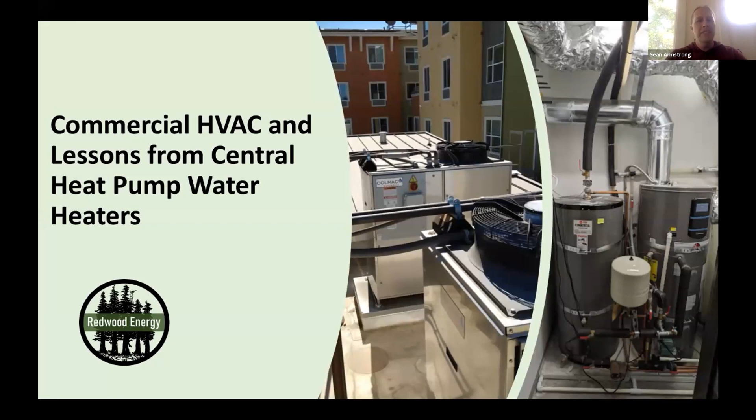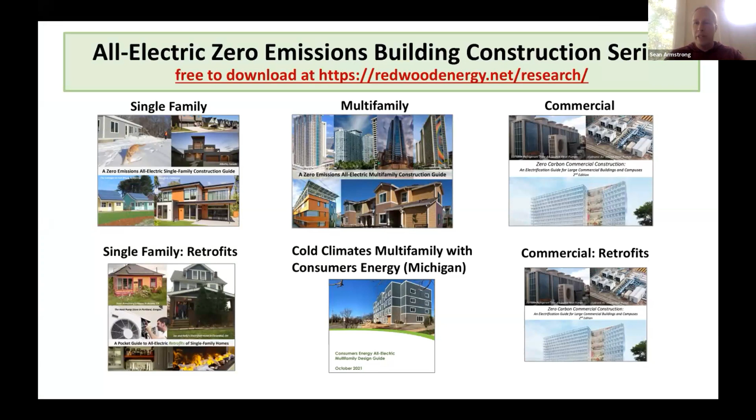I'm going to jump into commercial HVAC systems, and then we're going to feed into the lessons on central heat pump water heaters. So first, I'm going to go quickly. A lot of the lessons that are in these slides are from these booklets that are free downloads, just so you know, over at Redwood Energy's website.

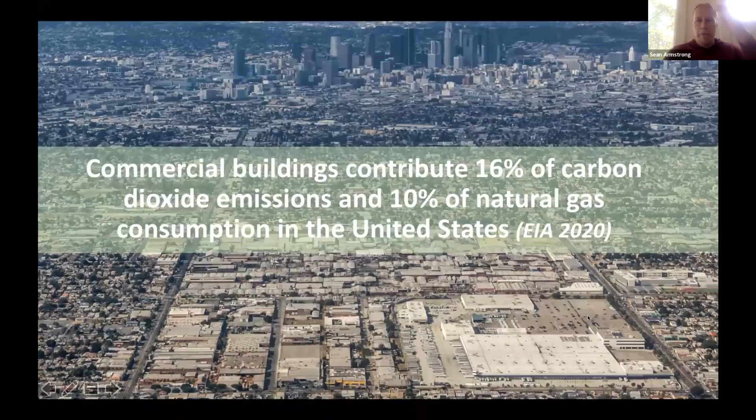Now, jumping into it, commercial buildings. This is a big load. 16% of carbon dioxide emissions in the United States, 10% of natural gas use, big one. So here's some prominent engineers. They just got to share the details. Almost all of our gut retrofits are able to go all electric. For major renovations, we're able to guide the client to go all electric by providing technical solutions that are cost comparable and have a similar life cycle savings potential to equivalent gas systems. And we can make these arguments pretty well.

So Ted Tiffany, Guttmann & Blaevoet, John Gautry over at Integral. Higher end developers and universities are absolutely 100% on board with electrification, no question about it at all. Taylor Engineering, prominent folks: 3 to 4 years ago, only 10% of our projects were all electric. Now about 90% of them are. Now in California, and I recognize every state's different. California has like 12% of Americans in it, and I have good stats on California.

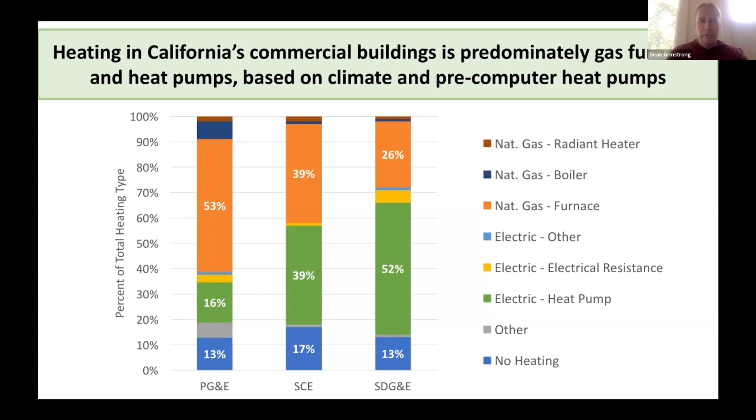So the lesson I want you to learn from here is the green is heat pumps, orange is gas furnaces, and it's different by climate. PG&E is Northern California, SoCal Edison is Southern California, San Diego Gas and Electric, the furthest south. You can see how as the climate gets warmer, heat pumps jump up to 52% once they work out climate-wise. That used to be the case when there were only single speed heat pumps. Now there's inverter controlled heat pumps that I'll share with you as we go, and they can do any climate.

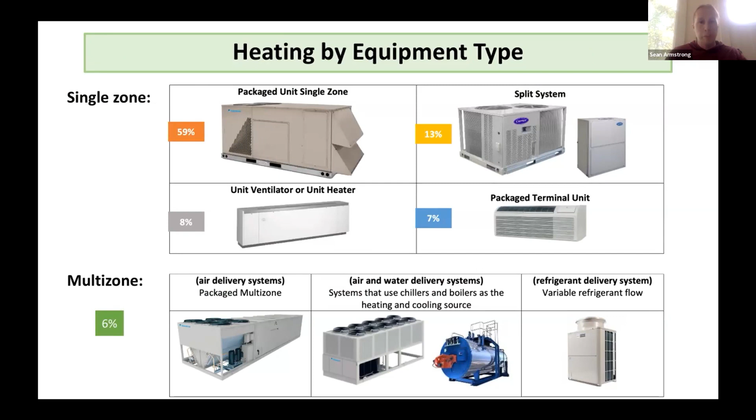So roughly what we're looking at in single zone products, 59% package, 13% split system, 8% just little wall units, and 7% packaged units. And then only 6% are the big building multi-zone. But big buildings have a disproportionate number of things in them. So it can be a very similar amount in square footage, big buildings versus all the small buildings added up.

So talking about these ones, Stet Sanborn over at the Smith Group says, the biggest market, if you want to make a move on actually getting gas out of commercial buildings, is to target the rooftop package units with easy retrofits. And it is easy. There's tons of these products that are made that are cold climate now.

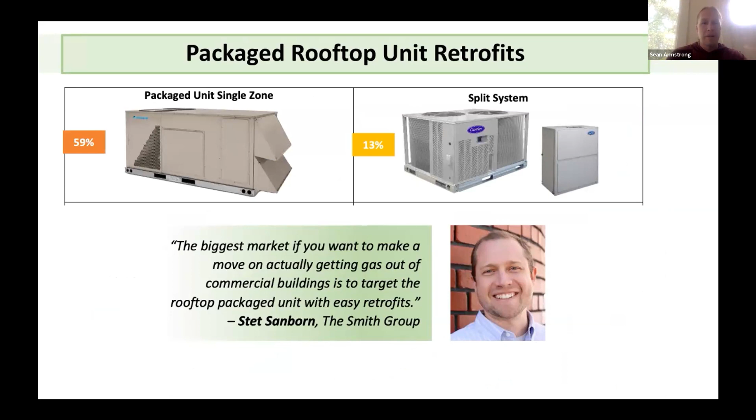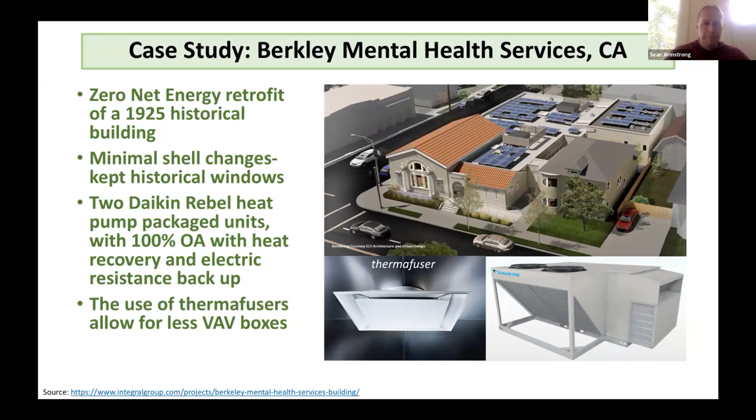So nice little case study here. This building is the Berkeley Mental Health Services, sorry, I think Berkeley might be misspelled without an E in there. Apologies. So it's a zero energy retrofit of a 1925 building. Very little is done to the exterior because that's generally not easy to do with historically protected buildings. So instead they went for efficiency with the heat pumps, 2 Daikin Rebel heat pump units that were packaged up on the roof with heat recovery and electric resistance backup and some fancy thermafusers for diffusing out the air. Okay, so this is a retrofit that was done with the packaged ones.

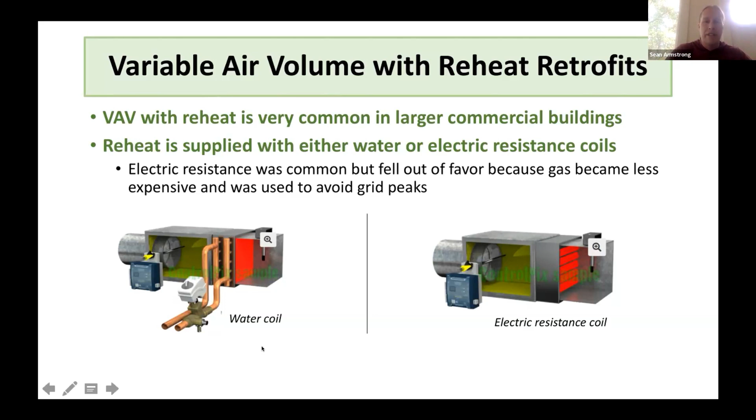Now I'm going to go into variable air volume. So these are VAV boxes. Air is moving through them. They've got dampers to make it variable. And you can heat these with water coils or electric resistance coils. It's not very efficient to circulate hot water, particularly if you're heating it with resistance. So resistance coils were an efficiency move, but essentially it's an electric resistance space heating system for a whole building, it has big grid spikes, not a great fit. So instead, going with a heat pump that feeds into that hot water loop, not an electric resistance boiler.

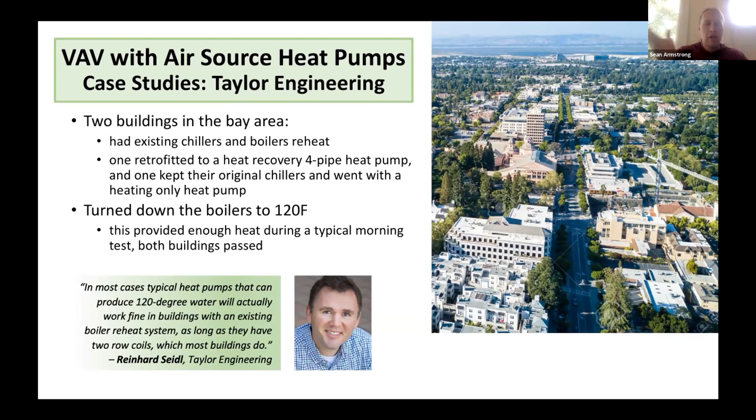So Reinhard Seidl there says, in most cases, typical heat pumps that can produce 120 degree water will actually work just fine in buildings with an existing boiler reheat system like that VAV box, as long as they have 2 row coils, which means enough surface area to distribute the heat, which most buildings do. There's a couple buildings in this picture here that they did.

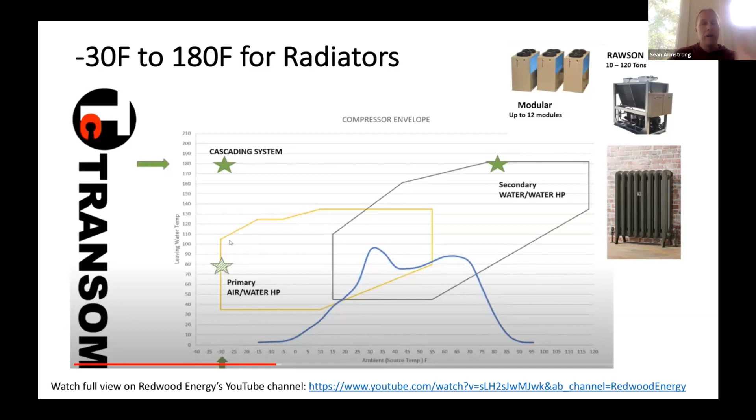If you had to get to 180 Fahrenheit, this is an example. This is a 2-stage process where you go from -30, say up to 70, 80 degrees Fahrenheit, and then take a water loop heat pump, water source heat pump, pull the heat out of that and take it up to 180 Fahrenheit. Transom did a nice slide show for me once, and so I use this as their image, but basically air source heat pump, that's for cold climates, and then a water loop.

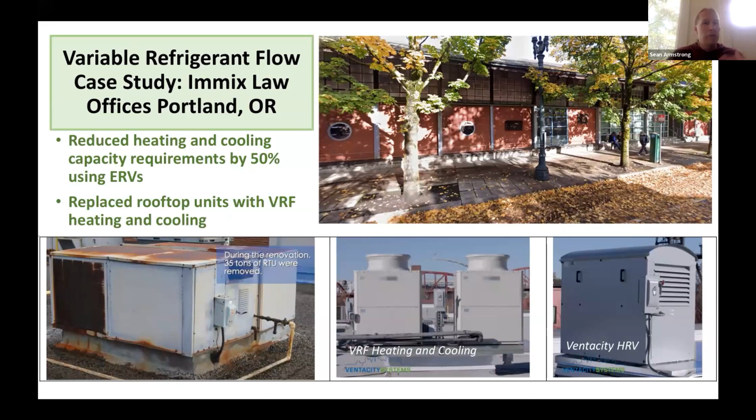Fantastic. So this meant that they could put in a space heating system with no increase in service because they had a whole lot of capacity. They reduced all the air conditioning on top of it. Now, lessons learned from a project that we led. We're going to transition out of commercial buildings for a second and start going into the boiler talk.

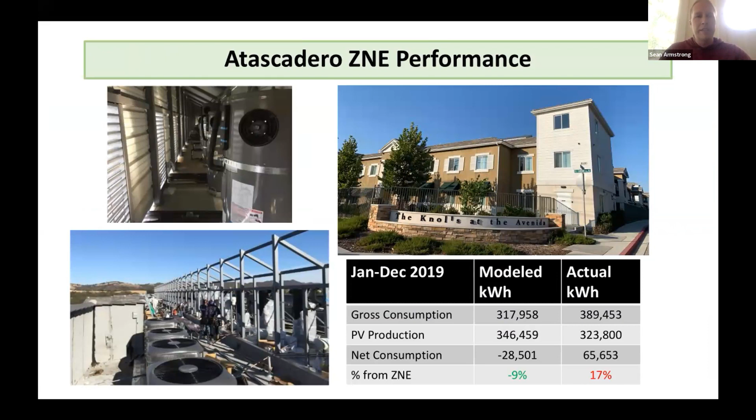So these are individual tanks that are up on the roof, kind of far away from the apartments underneath them. There's a whole heat pump garden up there, you might call it. Now we modeled this at being negative 9%, like 9% above zero net energy. Instead, we got 17% below. And we're like, what happened here?

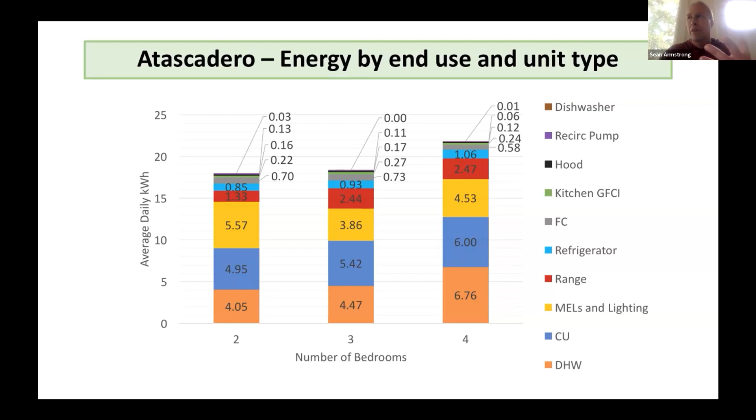So the basic problem is that domestic hot water we were seeing is about 1/3 electric resistance water heater. And we were seeing that the space heating is way above what we expected because there was an electric resistance crankcase heater, just metal wire wrapped around the compressor, that was supposed to keep it warm enough to keep refrigerant and lubricating fluid from mixing.

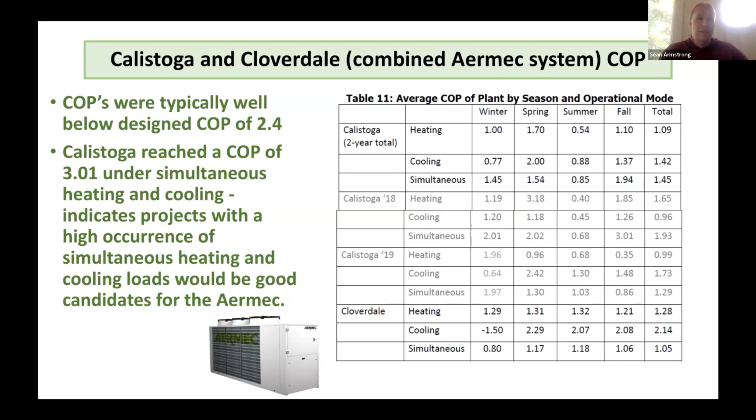So not very good. This is supposed to be like a high performance, efficiency-oriented heat pump system, and the design's not so great, but that's always an issue. Fundamentally, getting low efficiency, but not out of the Sanden heat pumps.

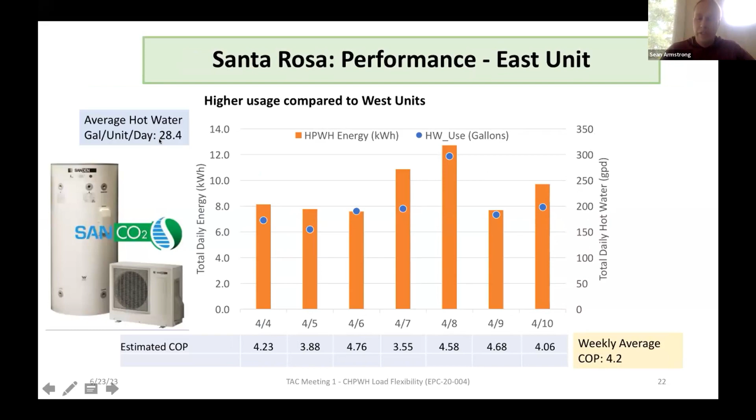So this is the other set of units. We have essentially the exact same average, COP of 4.2 over a week, as we have on the previous set of 7, but it's not the same data. That's fun. And it's also almost twice as much hot water use. The previous one was 13. This is 28. So that sort of sets up to say design matters, but so does usage behavior. So you're not going to see any one system looking identical to any other system. You always need to have a fair amount of data. You need to be able to average systems and compare them.

Albert, unless people have questions. Yes, of course, sir. This is your chance now to start digging deeper into well-designed central heat pump boilers. Well, after pausing for questions, I'm going to do that. And Sean, a lot of this information I actually hadn't seen before. It's really super interesting. I think you've got field data that we need to see more of. We have more of it too. I realize we could do a better job of sharing it, but some of this is not published because it's fresh out of our field research now. But this stuff is published. Some of the other ones are not.

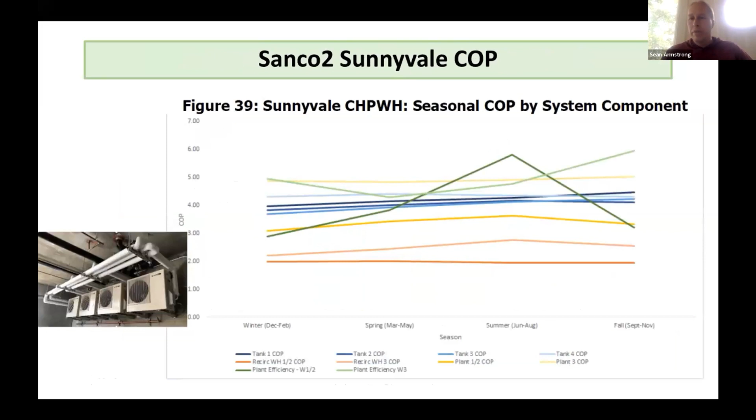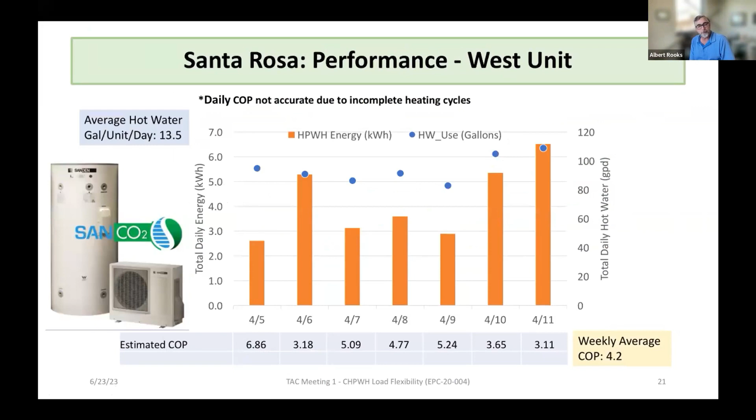So we struggle even on the Sanden single family application. We continue to struggle with recirculation loops, right? Because it has the same effect in a single family, 1 heat pump, 1 tank. And I've just not seen those numbers presented that way. That's a big deal right there. That is really, really helpful. I'm going to steal a screenshot. Boom. And I sent you the slides also earlier today. Thanks. But I think this is one of the most powerful before and afters, because we can turn off this recirculation.

This was an optional recirculation system that was going off because the sunlight outside changed and a bird flew by and a dog ran by and there was a mirror in the bathroom and who knows what. But we had like 60 tanks that we were looking at that all had destroyed COPs, and we had to go through, and every single one of them got turned into a push button. And we learned that people only use the push button about half the time when they're in a bathroom. Oh, well, yeah, that makes sense.

And they want to incentivize something that really works, not something that looks good in a plan but whose actual site performance degrades, kind of like what Sean's showing. So it becomes a real process and a real question about how do we achieve that. There's a number of answers, but one part of the answer that really got us excited was pre-packaging and building things out so that they can arrive to site completely ready to go.

Great. I jumped a slide there. Sorry. Okay. So there's the slide that I want to be on.

And so part of the solution was an adventure in pre-design and pre-packaging to cover two different things. One is that in working with Sean, we and others in the industry, someone will bring us a building to develop one of these domestic hot water systems using the SanCO2 heat pump. And we would typically, in a commercial application, use many heat pumps and a few tanks and develop a design and a sizing to suit the building, and then recommend it for a site installation. At that point, we're offering some consultation and a design potential to an installer.

And there's multiple people on the team, right? There's people in the design and the energy modeling, and then people in the mechanical design, getting everything to line up correctly, making sure there's power to the building. And then there's an installer, and then there's someone starting it up, and then hopefully everything is arranged right. Over the years, what we found is these SanCO2 designs work really, really well, and we're able to get a really good level of efficiency out of them as long as they're installed right. Installing right is a big capture because there's a lot of things going on.

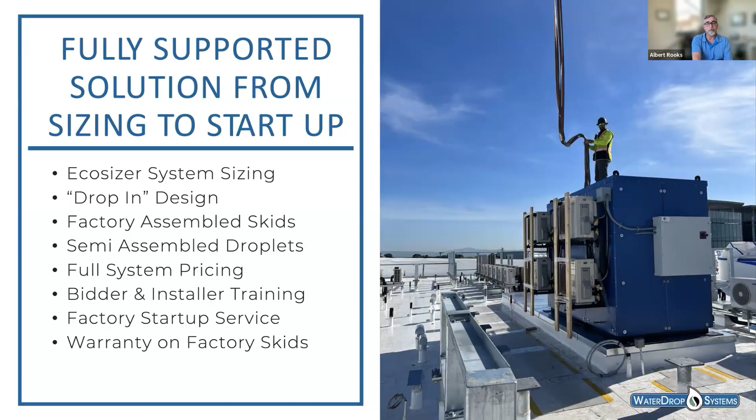We developed two systems. We'll look at this system first, which is the package skid. So there are about 7 sizes, and these 7 sizes can serve a range of buildings from very small to very large. And it is a possibility where we just look at the building load and say, well, that's this water heater right here. And this is literally a water heater, or it's a boiler. It's the new boiler that's able to just set on the side of the building. Cold water comes in, hot water comes out.

After it goes through a mixing valve, out to the building, the recirculation loop will bring it back into the system, and the system will receive the recirculation and isolate it away from that primary storage to avoid that degradation of COP that we saw in Sean's talk.

This is probably a great example to look at this simple cycle of how these systems are designed around this little SANCO2 CO2 refrigerant. And the SANCO2 CO2 refrigerant has a lot more potential than the tall unitaries that we used in the project that we're going to look at, and the project that Sean was talking about where we had that garden of heat pumps, hopefully with decals of green ferns and forestry things up in the garden area on the heat pumps.

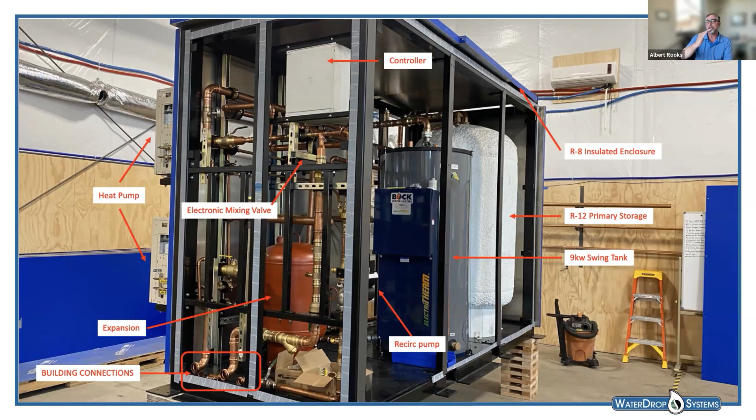And the way around that is to actually move that recirculation return to a separate tank and isolate it and treat it as its own little function. So that gray tank in the middle, which in this skid is a Bock 119 gallon tank with a little electric water heater element in it, is called a swing tank. And it's called a swing tank because the temperature in the tank will swing high and then it'll swing low. And then it'll swing high again and then low again.

And so what we do... Albert, may I interject? Yeah, please. I just want to note that you did put a heat pump in that function, the recirc system. Yeah, so when we look at the project, you'll see that it's actually a heat pump in the Parkside project. Right.

So we'll walk through this last little section about how a swing tank works. In a swing tank application, the swing tank is there to prevent those losses when you have a recirculation system. If you don't have a recirculation system, you don't need a swing tank. So what it does is, instead of pulling water out of the top of that big white primary storage tank at 150 degrees and sending it out to the building, we'll send that water out to that swing tank.

It'll go into the swing tank and we'll heat the whole swing tank to a full 150 degrees. And we'll keep it at 150 degrees as long as water is being pulled through that swing tank and people are using water in the building. As soon as they stop using water in the building, then we've got a fixed temperature. Okay, so now let's look at the other side of that transaction. We send water out across the building, it doesn't get used, and it comes back. When it comes back into the swing tank, it always comes at a little bit lower temperature.

During the day, when people are using hot water, there's enough of the high temperature fresh water coming in from primary storage to keep that swing tank at full temperature. But at night, when people are not using domestic hot water, the system is stopped. So we're giving water out of that swing tank, losing 10 degrees and bringing it back. And we do that for 5 or 6 hours, and we'll actually lower the temperature of that swing tank from 150 well below the mixing temperature of 120.

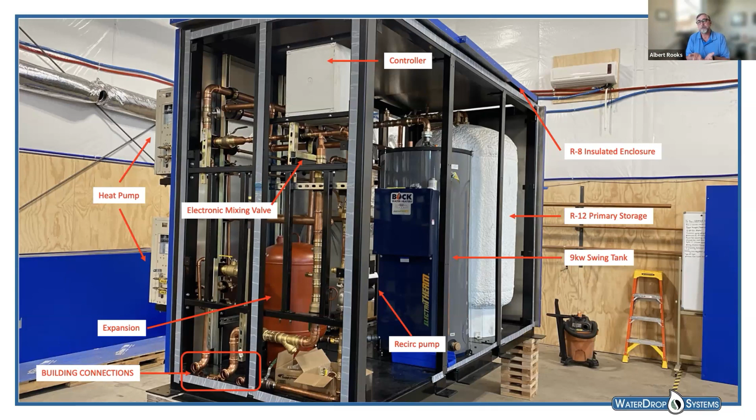So now we've isolated that loss away from the primary storage. So the heat pumps and the COP are going to be very happy. We're not damaging the system. And all we've got to do now is, when there's a call for water, make sure that we lift that swing tank temperature back up above 120. And we do that by just using an electric water heater, or in the Parkside apartments, a unitary heat pump water heater.

So in this case, we'll have a heat pump heating another tank of water that's being reheated again by a heat pump. So it's a heat pump on a heat pump. And I guess if we throw enough mirrors in there, it can be infinity. So in any case, that's how we isolate the swing tank losses away.

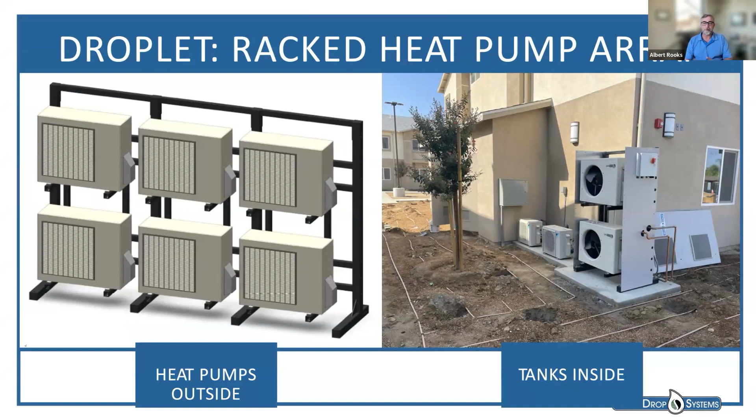In the Parkside apartments, we wound up developing a system where we could build the heat pump array in a prefabricated shop and then take it to site to get it installed. And so that's exactly what we did. We find that we're coming into this building after construction has already started, and we've got some limitations. We designed a system around these droplets where we can cover a lot of building sizes, but we don't necessarily need to look at that right now. We'll take a look more at the actual project and come back and look at the sizes. Suffice it to say, we can cover very, very small buildings like this building, or very, very large buildings.

So now let's look at the building. We're looking at this new project, and we're actually capturing this project midway in construction. Here's this collection of 5 buildings, which are small buildings, and each building has got 4 to 8 apartments in it, 4 low and 4 high, or a mixture close to that. And it's already designed, and it was designed for a gas boiler. So now we've got to apply a heat pump into it. On the left-hand side of the screen, in that center section by the number 5 in a circle, you can see that these were the closets that were set up for a boiler. And that's really the space we have to work with.

And the interesting thing is, with a central heat pump plant that is going to serve a building like this or bigger, you generally need more space, because a gas-fired boiler is not much of a thing, really. You've got a tank of water and a burner below it, and a pipe of gas, you bring in the gas, you light it on fire, and you've got energy to lift the water. So it doesn't really take that much space. If you need to lift more water or push more water through, you just add more gas.

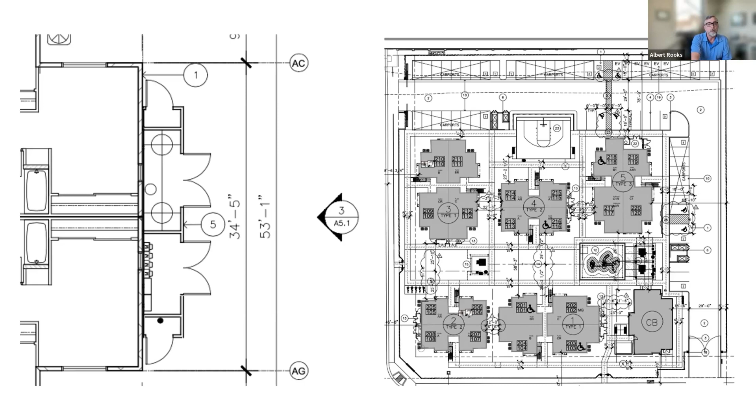So we were really struggling on how we're going to fit these heat pumps into these small closets that are also going to handle service panels and fire alarms and just, you know, all the other things that these mechanical closets would be working with. So that's where we kind of crafted a solution based on understanding what the load is.

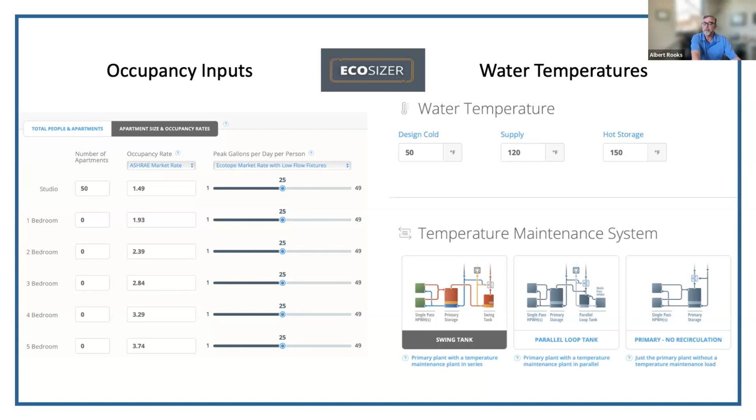So in understanding the load, the typical tool that we would use would be the EcoSizer, which is a relatively new tool. It's about 2 to 3 years old at this point, and it allows us to enter a lot of data and come back with a system sizing. And the system sizing in this particular building was rather small, and it's on the small side of the EcoSizer. And the EcoSizer is a new tool, so we need to do some separate checks.

So we run some sizings in the EcoSizer. We start understanding really maybe what the building needs. And then we run another separate set of calculations to make sure we're really within the range of where the building is going to be operating for its domestic hot water plant. But we come up with a sizing.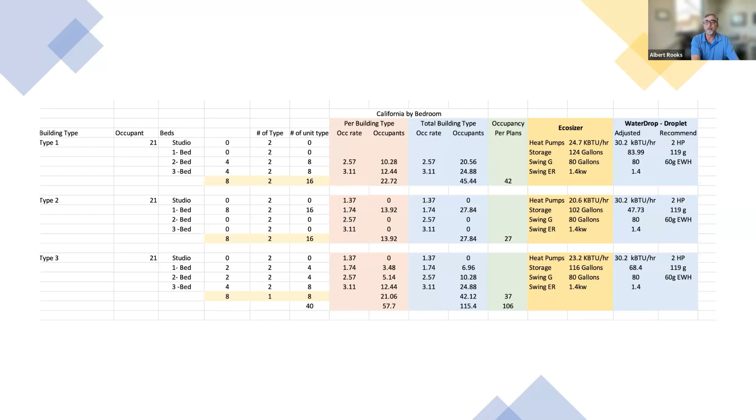The sizing tells us kind of what kind of plant we need. It tells us how much heat capacity, or heat pump capacity, we need, and then how much storage we'll need in the additional swing tank. And then we average that storage across the building types, so we can make one plant and prefabricate it and deliver it down into the building.

And to make it even more interesting, we are helping to develop a full M&V package to confirm how this building performs and how the plant performs, and whether it delivers the planned COP of something above 3, and whether our design and our sizing has enough domestic hot water capacity to serve the building without running out of hot water. And so we started that work, and these are the tools we're given.

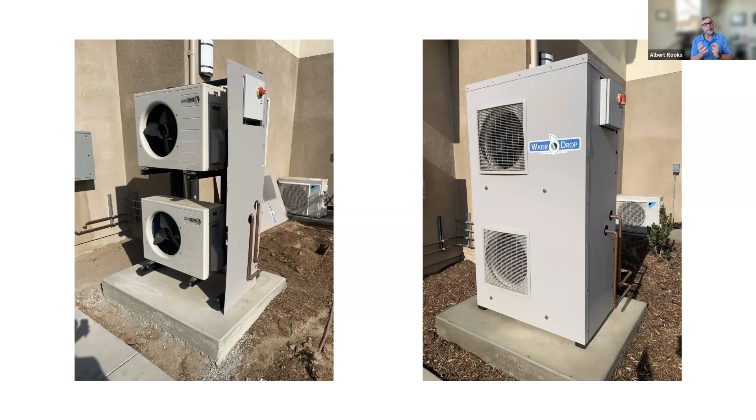Each heat pump is using CO2 as a refrigerant, so it's super efficient. It's got its own internal water pump. It's a variable speed water pump. The compressor is variable speed because it's an inverter driven system. So we can do a lot, but we've got to make sure that it's piped and operating at optimum performance in order to get that high COP, because each one of those heat pumps is only going to use about 1,000 watts when it's in operating condition on a day like that in Central California.

And so it becomes really important, all those components and how it's piped, and have that deliver on site and go into the building and get started up without any mishaps and any questions.

So I want to interject, Albert. Yeah, please. Because I didn't mention the field data, but you brought up how important it is to have a variable speed pump. So you have a variable speed compressor, awesome. The pump allows us to meet more water demand or less water demand, as opposed to just always being on or off. It's a big part of the efficiency of this system that you've put together that we keep on seeing. If we have single speed pumps, it wrecks the efficiency of the system, because people don't have single speed demand; there are all sorts of different demands over the course of a day. So anyway, I just wanted to re-emphasize that point.

That's all. Yeah, exactly. And so really it's the heat pump itself. And then we've got a system between the heat pumps, the primary storage, and the swing tank that allows for the morning peaks, maybe no activity during the midday, and then the afternoon peaks.

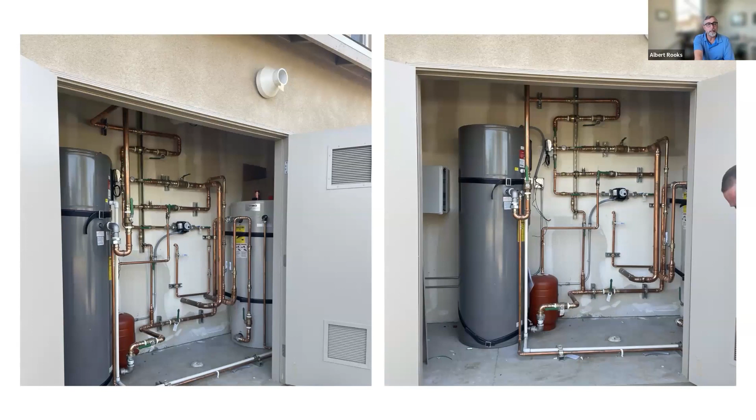And you can see in the left-hand picture, we've got a single power landing for both heat pumps. There's a control on the inside of the building. I think we'll see that here in a little bit. And in this picture, we've got a swing tank on the left, and that's an actual unitary heat pump. And it took a little bit of work to make that work. These unitary heat pumps handling a larger building have smaller ports, 3/4 inch ports.

So we had to do a lot of calculation to make sure that we could support the water flow in the, I believe, type M copper, to make sure that the copper wouldn't be deteriorated by the high flow and the reduced diameter, because you can see it's kind of a mixture of like 1.5 inch piping and 3/4 inch and 1 inch piping. And so with the larger diameter of the piping, we get a little less resistance and a little longer wear and tear.

And in this system, you can see that we've placed the recirculation pump, and we've got a lot of room around that piping, because what's going to happen next is that a whole lot of metering is going to come back on site and get cut into this piping arrangement. And the reason it's so spread out and placed against the wall is to have enough pipe length to smooth out the flow and get this nice laminar flow, so that the flow meters are reading an accurate flow. Normally, it doesn't look as large as this. We can usually fit it into a tighter space, but we're going to gather a lot of data with this system.

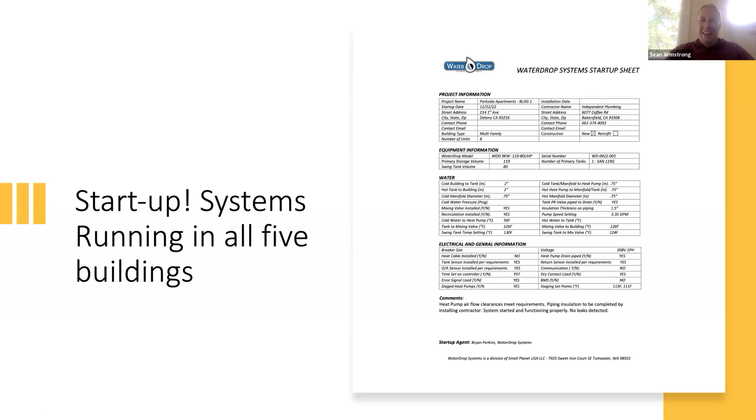At every step of the way, this was a fight and an unpleasant interaction with people who didn't believe in it and didn't want it to happen. And in fact, it works awesome. And it got done, it happened regardless, because we know how to make systems work, and they're simple. We're using ambient air to create hot water rather than burning a fossil fuel, and it's totally doable.

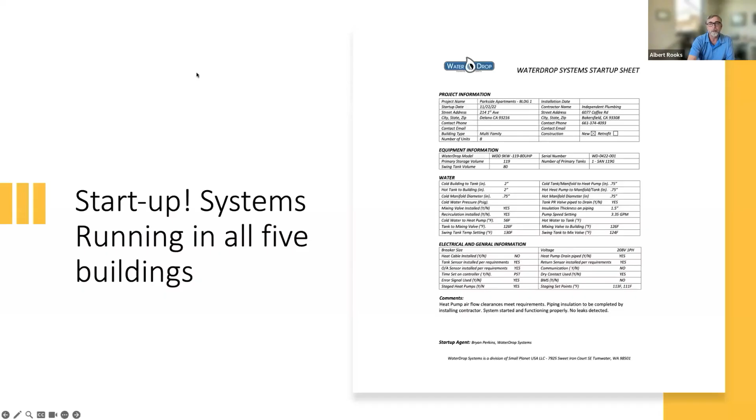It's totally possible. The funny thing was, I remember getting all of those emails, and it was such a simple thing. So if we go back to this picture, think about what's happening. In a normal building, the heat pumps are making hot water. They're putting it in the primary storage on the right-hand screen, and then giving that hot water out to the swing tank, and the swing tank's doing its high to low thing. The hot water goes into the building, people use it and everything's fine.

Any water they don't use comes back into the swing tank, and the swing tank cools down after a while. So that's a normal building with people living in it. In a brand new building, we start it up, watch the system, go into all the fixtures in the kitchen, bathrooms and showers. We run the showers and faucets, see hot water coming out, set the mixing temperature and the recirc temperatures, and that's a factory startup by us. Then we say, okay, you're all set, fill in our startup sheet and go.

But if the building sits empty for a month, there's no hot water consumption, and you've got this isolating swing tank whose job is to isolate those losses away. So when somebody comes in 2 weeks later to do a building test and check the fixtures, they're not going to see full temperature hot water because we've isolated that away. The recirculation loop has probably lost all its energy, and the swing tank is ramped down, and it'll take a while to ramp back up.

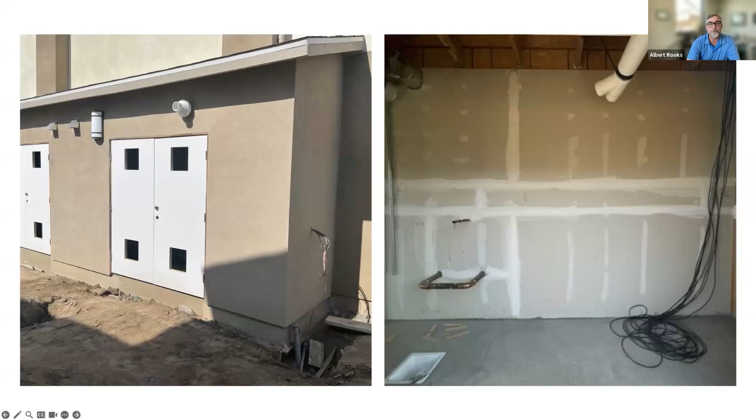So this is really most of the system. It was a super interesting project, funded by the CEC in California under a tech grant. Part of the goal of the tech grant was for us as a company to come back and create this as a product. Let me see if I jumped out of my slides too far. So that's what we've done now by creating these additional measures.

So part of the tech grant was, let's use this building as a model for building adaptable systems that can be installed in tight spaces, and the real focus is existing buildings. How do we treat existing buildings when heat pump water heaters need more room because there's more functionality than just burning a fuel? So we created the droplet program. The top line, droplet 2, is what's in the Parkside Apartments: 2 heat pumps, 31 kBTU an hour.

And then we just started building more. We built an entire pre-engineered rack system that can show up on site just like that. It's a collection of heat pumps put together on a rack that can be set on a roof or bolted onto a pad. It's all pre-piped, so there are only 2 water connections.

It's pre-powered, so there's a single power landing. It has a master staging controller. And by the end of this year, it'll also have the EcoPort. And the EcoPort is the box that the utilities are looking for, so we can really get these water heaters to work in the demand response, or in addition to demand response, which is the utility saying load up because we've got excess renewable energy that we want to place, and we can place it into the tank as thermal